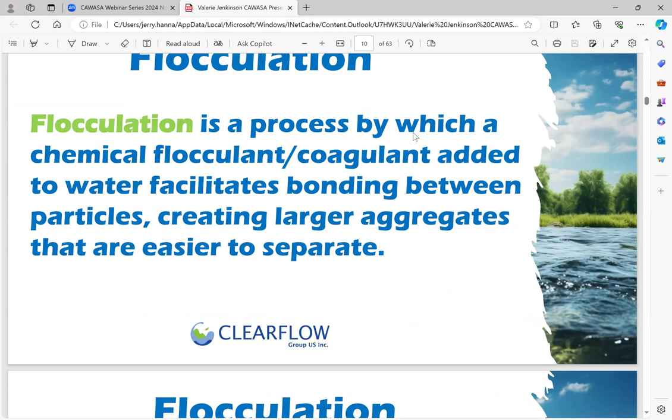Flocculation is a process where chemical flocculant coagulant added to water facilitates bonding between particles, creating larger aggregates that are easier to separate. Our goal initially wasn't to cause the separation, but to cause a particle large enough to capture. The beauty of it was we did it so well, we were able to really clean the water down at the quantum level.

Jar test demo—I'm not going to do that here today, I don't have the stuff. That was what Hank was going to do as part of this. But basically it's a very simple process, 10 to 45 seconds. You mix it around and the deposition starts virtually immediately, and we're looking at a ratio that we can now coordinate the time factor and optimize the usage.

Industries we serve include mining, construction, agriculture, water treatment, stormwater, and hospitality environments.

The other thing to consider is that we can act as a pre-treat, a sole treat, or a post-treat, depending on the application. That's a rather unique position to be in, because if we're going in as a pre-treat, we can augment something that's already there and use existing processes and infrastructure. If we go in as a solo treatment, we can utilize existing infrastructure wherever possible, really minimizing costs, with a very simple application to add into the process.

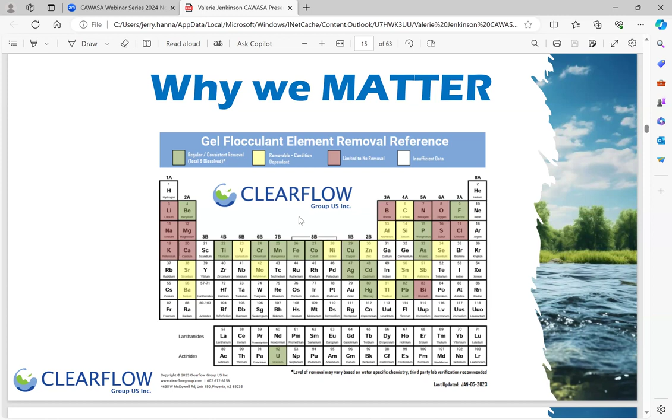We keep adding more and more to this process as our clients come to us and say, can you take this out? Recently we had fluorides - can you take out fluorides? The answer was yes, up to 96%. Can you take out phosphorus, dissolved and total? Yes, we can. Because we're the manufacturer and inventor of the products, we typically invent one or two new formulations per year to answer these other water streams and waste streams we're dealing with. It's a very unique capability, unlike standard flocculation.

Everybody understands the result of a flocculant or coagulant, what it does, but our chemistry goes far beyond the standard chemistry that's available. We're not just creating a thickened process and then combining and falling it out. We have a very good process here where we're actually taking it out without having to worry about things like pH.

In most flocculation processes, pH is a critical part of it, and they're really limited by the pH in the water. If it's a pH of 3, it's very difficult to treat - they may have to do some crazy balancing, or at a 4 or 5. When they're up around 10 or 11, they can't get it out either. So one variation in pH can cause a problem with standard technology. Our technology allows us to work within a range of 3 to 12 without any variability whatsoever in the efficacy of the product. That's a really unique scenario to be in.

Because we started this in mining, dealing a lot with mining and oil sands in Alberta, we had to deal with temperature variances. For mountain mines, we had a lot of issues with freezing temperatures, and we do a lot of cleaning of water in frozen lake beds, treating the water below the ice. From freezing to boiling, we can operate with full efficacy in both.

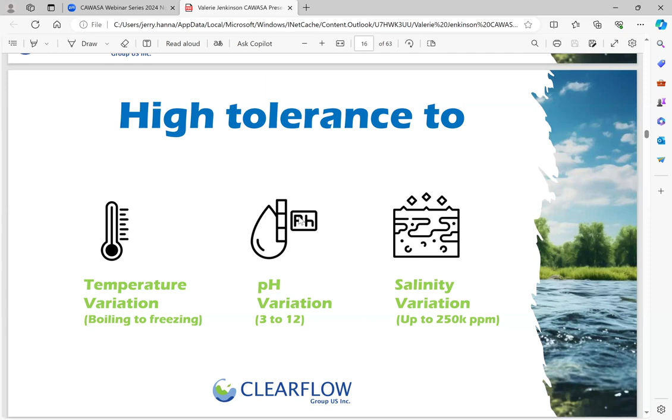One case, we're even up to 250,000 milligrams per liter, parts per million. That's not typical, but we have done it. For the most part, freshwater to seawater is a very easy range.

Operational resilience: this material is self-dosing. It does not require dosing pumps. It's a gel flocculant. Now that Hank's on board, I'm hoping he'll do a demonstration after I finish going through this process to show you how the jar test works. So we don't require costly sensors. It's self-limiting, we don't need metering, and we're not having a lag time.

As I talked about earlier, we're dealing with particle size, not necessarily getting to a particular volume in the water. That gives us a very unique process in pulling out these particles, because they're gathered and bonded through release based on the load factor. So if you have 100 milligrams per liter of TSS versus 1,000 milligrams per liter, it will release the required amount to accommodate that load factor. If there's nothing in the water, TSS is like 1, it releases way, way less than it would at 100.

That gives us a unique property as well, and a long release time. The gel flocculant blocks, if in situ and just put in an open channel, will last anywhere from 8 to 12 weeks - we'll see some pictures in a moment. In some cases we're getting as high as 15 to 18 weeks, but standard is about 8 to 12 weeks. If you're in the reactor or pipe systems we've developed for mixing, those are about 2 to 4 weeks before they need to be replenished.

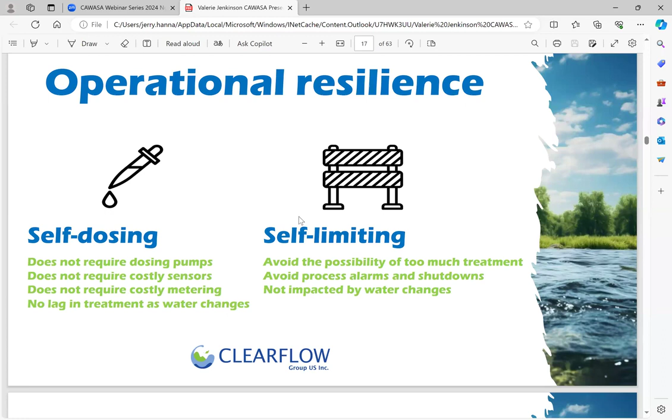Environmentally friendly - we've won numerous awards. In 2022 we won the Sustainable Earth Award. We won 2021's Clean Tech Award, an international competition where they chose 3 companies to be the winners, and we were one of the 3. We're very, very proud of all the awards we've won over the years - probably too many to mention.

Our approach is to utilize site-specific samples, layouts, and documents to understand the challenges our clients face. Then we come up with a solution based on our gel flocculant and our ClearFlow technology that will be optimum for the site. We do request water samples so we can determine a specific match of our formulations to the water chemistry and constituents in the water.

Now we get into the wastewater fun. Well, I've been dealing in wastewater since the first, when I was 6 years old and fell into a septic tank. I don't think life has ever stopped since then - I've always been around water of some type.

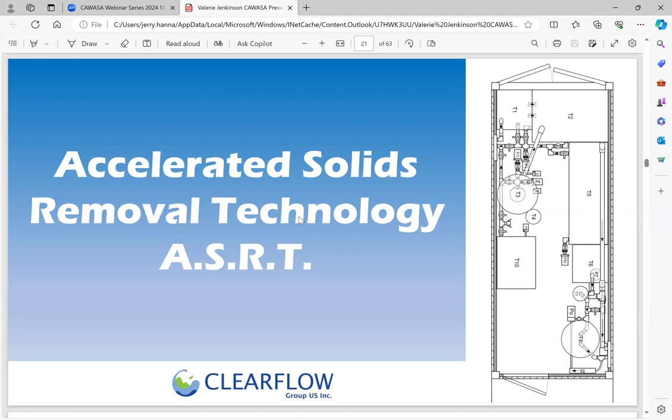We developed a system called Accelerated Solids Removal Technology, or ASRT. The one I'm going to show you here is for 23 cubic meters a day treatment. It's a batch process, but they're scalable, and we've scaled up to larger units. You can put them in series as well and do higher volumes. We have a number of them in India going anywhere from 10 cubic meters per day up to hundreds of cubic meters per day, so it's just a matter of seeing what's there.

Our comparison: centralized wastewater treatment is becoming a big issue, mainly due to infrastructure and cost of running infrastructure to low populated areas. They're large, expensive to build and operate, complex, require lots of money, people, technology, and training to operate, and they have a bit of a limited user base. Then you have localized wastewater collection, which goes to a sump system dumped off at a centralized plant - inexpensive and portable, but again manually intensive.

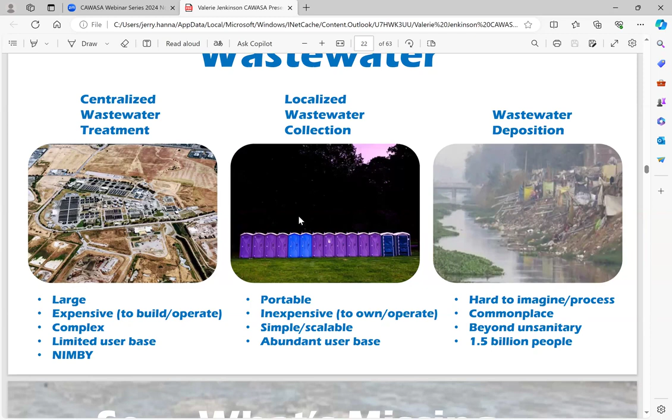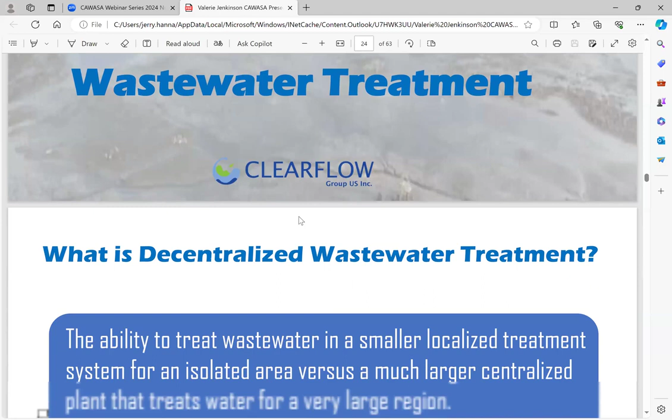It's pretty scary stuff in some of the sites that I've been to all over the world. What's missing is basically an innovative decentralized wastewater treatment process, which we feel that we've come up with. In my 47 years of dealing in wastewater, this is probably the most efficient system that I've seen. I hate to say that sometimes because I really sound like I'm blowing my own horn, but it is a reality, and we've been told that by many, many people that use it.

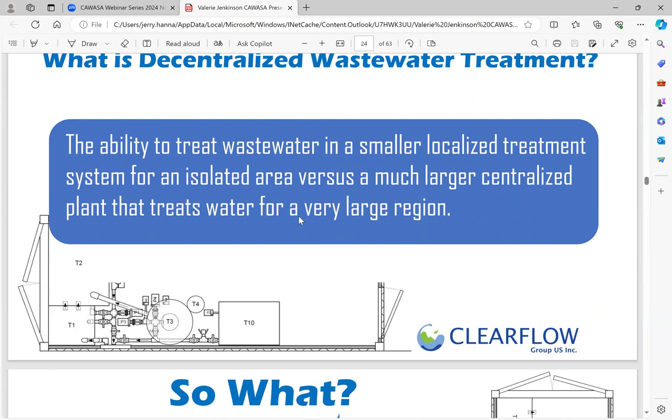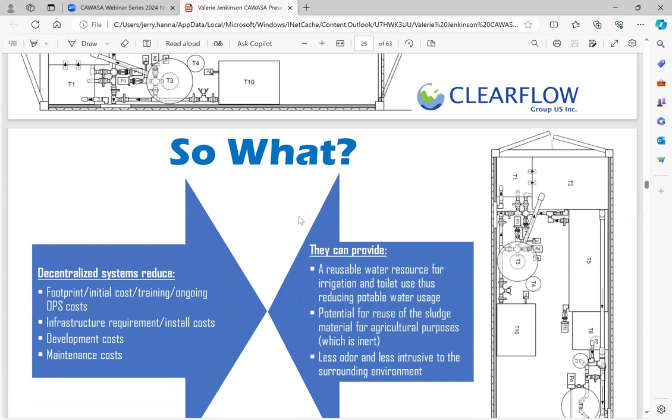From the perspective of operational, it's very simple. You do not need to have multiple engineers operate it, and it can very easily be moved, transported, portable, or made to a fixed system. So what we do with decentralized systems and our ASRT system is we're basically minimizing footprint, timing and process, initial cost, training, ongoing operational cost, infrastructure requirement, installation, and development costs and maintenance costs.

The core technology in the ASRT, again, is our gel flocculant, and it's very unique property when it actually deals with ozone, because we do have ozone that we've operated in this very low self-producing ozone system. But typically to get to an ORP value of about 780, you're looking at about a 20-minute process. When we add the gel flocculant within our system to this process, we're gaining a huge amount of time, in about 4.5 minutes we're at the ORP value required. So really a huge, huge difference in operational capability and results.

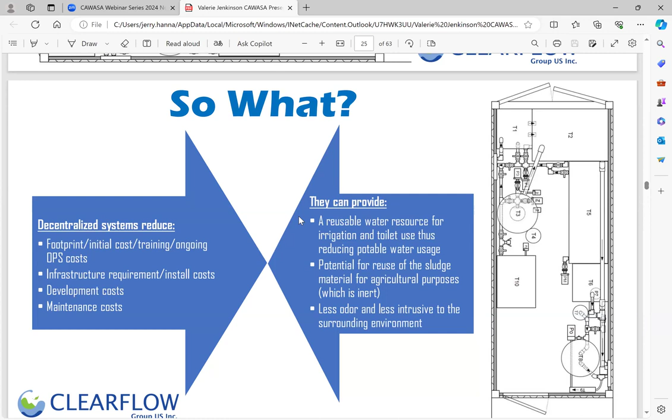So again, we're providing a reusable water source for irrigation and toilet use. We're providing potential for reuse of the sludge material. The sludge that's based in our system, once it's done, that sludge material is basically inert after 24 hours, so it can be reused. It's not going to have the bacterial issues that most sludge materials would have. Again, less odor, less intrusive to the surrounding environment as well.

So it's a physical mechanical process that Clearflow has developed and patented. It allows for the removal of sediment within minutes, not hours, or days or weeks. Typically, if you were to put this beside most even decentralized plants that we've dealt with, our operation is within 3 hours, you're seeing clean water. We like to say 24 because then everything has happened, even with the sludge. And it will do about 5 weeks worth of work in that short time period. So it's a huge competitive advantage to have this process.

We constantly are working with the National Research Council of Canada and University of Alberta. I represent as an ambassador for them as well. We're very heavily involved with doing continual research, and I lecture at the university as well, probably about, oh gosh, at least once a month I'm in there helping students and PhDs finish off their graduate studies, etc.

It's very good where we're looking at, again, all of the constituents within the water, TSS, TDS, BOD, removing it from the water down to the levels that need to be hit, and for reuse as well. So we're really looking at that, having an advantage of very clean water for repurposing. We're continuing to develop and research into much more applications, which, as we're finding as we go into different countries, various things that we're looking for.

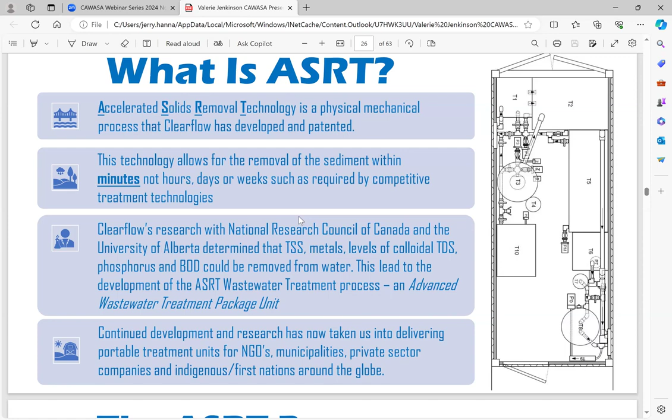One of the advantages is that we get a lot of the metals and things out as well. And in much of the wastewater streams that we're dealing with in some of these countries, they do a lot of mining or close proximity to all their waste streams. We're having to take out some very nasty metals as well. So this process does it all in one. You're not having to add a secondary process.

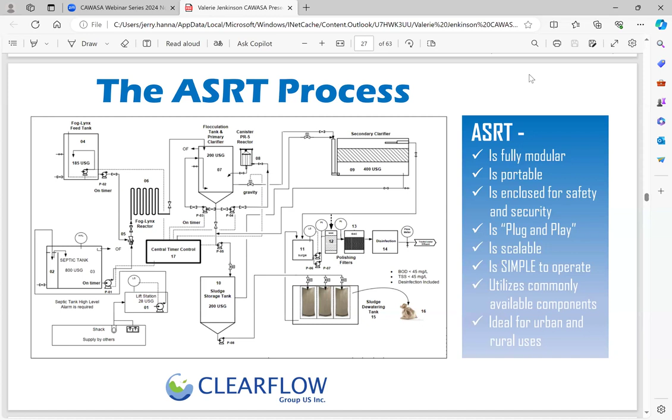It's fully modular, it's portable, it can be trailered. It's enclosed for safety and security, it's plug and play. We've made everything so it's field ready and field maintenance capable. So it's a matter of just changing out a pump, to just unplug one pump, put the pump back in. We've made it very, very simple for the operational piece. We're all about the operations and making sure that it works for those in the field. It's scalable, it's simple to operate, utilizes commonly available components, localized, and ideal for urban and rural uses.

So stage one in the process for the ASRT is multiple source influent water consolidation, loading surge tanks for volume control, utilizing macerator pumps to achieve particle size uniformity, and also looking at going into stage two.

The influent water is treated with gel flocculant and what we call Fog-Lynx, which actually destroys the fat, oil, and grease by breaking it down—something most systems do not do. Those systems get a buildup of fat, oil, and grease that causes a lot of clogging, whereas ours breaks it down and makes it simple to incorporate into the process and release the water.

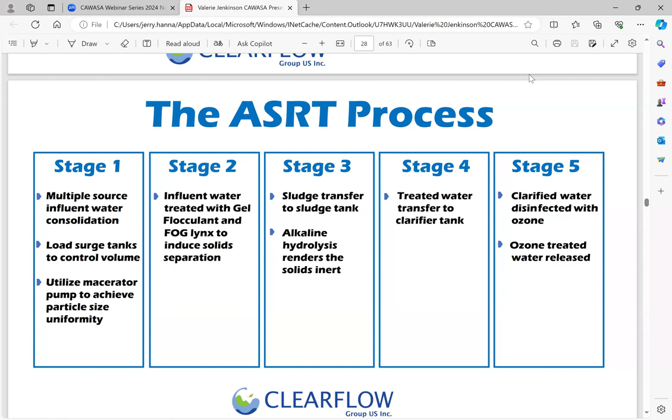Stage three: sludge is transferred into the sludge tank, where an alkaline hydrolysis process renders the solids inert, as I talked about earlier. Stage four: the treated water is transferred to the clarifier tank. Stage five: the clarified water is disinfected and ozone treated and released.

The process on a 150 gallon batch system is about a 20-minute batch cycle time. So real simple and easy.

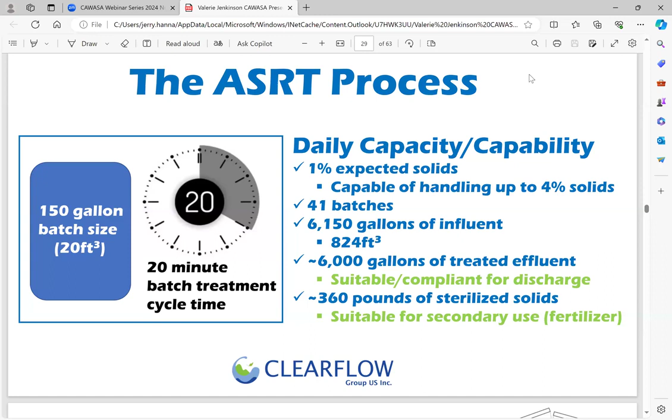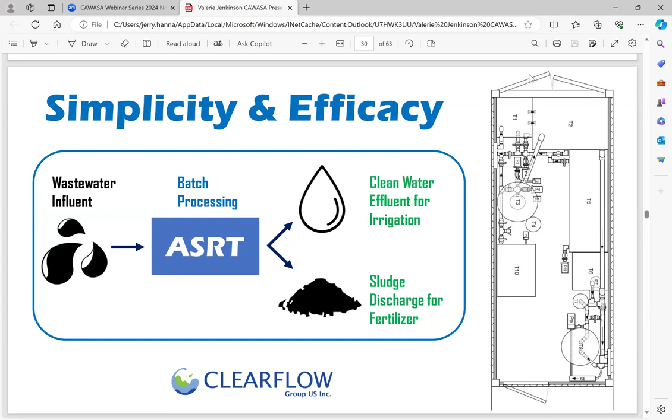Basic capability is 1% expected solids ratio, capable of handling up to 4%, across 41 batches, or 6,150 gallons of influent. About 6,000 gallons of treated effluent is suitable and compliant for discharge, and we have about 360 pounds of sterilized solids available for secondary use. So really a simplicity and efficiency process, with high efficacy, and a lot of resultant reusable materials.

Results—this is actually some results we had done by a lab in India. The reason we put this here: if you look at the bottom, they had a lot of metals—iron, nickel, but also chromium, which was really nasty. We were able to take all of those metals out and bring them down to non-detect.

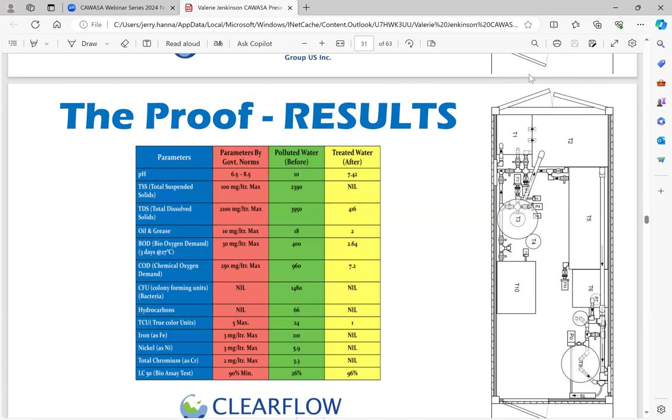We also took the TSS down to virtually a non-detect factor. The pH just needed a slight balance. The total dissolved solids, of course, reduced dramatically by about 8 times. And the fat, oil, and grease—again, a big one for us—we reduced by 9 times. So the results are rather amazing for what we can get out of a very small system.

This particular unit, as mentioned, was the 23 cubic meter per day system—a really simple 20-foot C-can or containerized model. Setup time is about 8 hours to get everything operational with the lift stations, and technical support is available.

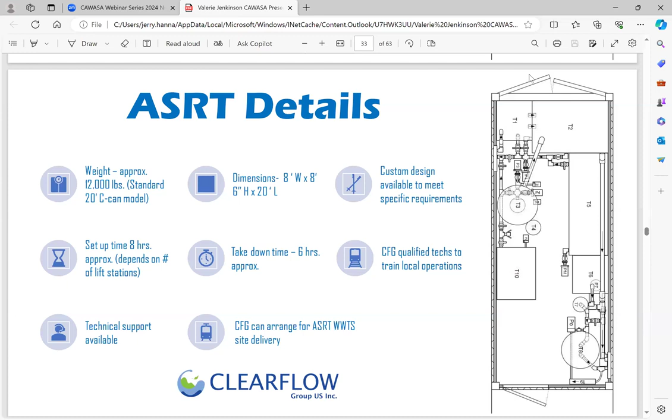Dimensions are about 8 feet by 8 feet by 20 feet long. Takedown time is approximately 6 hours. We can arrange site deliveries, etc., and it can be configured to meet specific requirements. If you have industrial waters to deal with, we'll run extra testing in our labs to make sure we get the right formulation for that application.

So again, going into repurposing and water restoration, we talked about different flocculant types currently available that have been around for many years—granular and liquids—and now, of course, our addition of the gel flocculant.

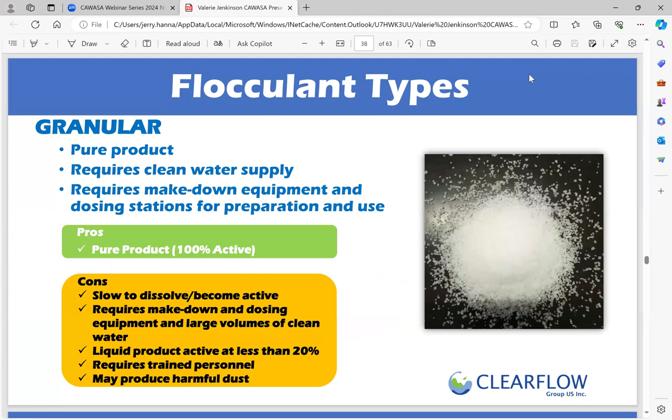Granular is a pure product. It requires a clean water supply, make-down equipment, dosing stations, highly trained personnel, and a very high ratio of monitoring to ensure no negative effects on the environment. It's 100% active, available in cationic and anionic forms depending on the application.

In many cases we see anionics used less than cationics, although that's starting to change. The cationics have very negative effects on aquatic life and are slow to dissolve and become active—typically a 90 to 120 minute make-down to convert it into a liquid before dosing. Most people don't wait that long and end up dosing out live product, which often results in a lot of animal kills or fish kills.

It requires make-down and dosing equipment, and large volumes of clean water to make it down, since you're typically running at about 0.5% to 2%—no more than a 20% mixture, but typically 0.5% to 2% is the operational ratio. So you're looking at well over 90% being water.

So the liquid product is active less than 20%, as I mentioned, and requires a lot of people to operate, and can cause inhalation issues for humans from the dust off the granulars.

Liquid again, there's two types. There's the emulsions, which is water and oil already pre-mixed in a specific blend. You're still looking at about 70% water and oil mixtures; approximately 30% is active product, and it requires addition of a coagulant.

Typically the equipment for them alone, in North America, is about $200,000 to $500,000 per unit. So when you have multiple site units on a large location, it can become quite costly. That's one of the biggest things - high cost to ship, since it's mostly water in the product.

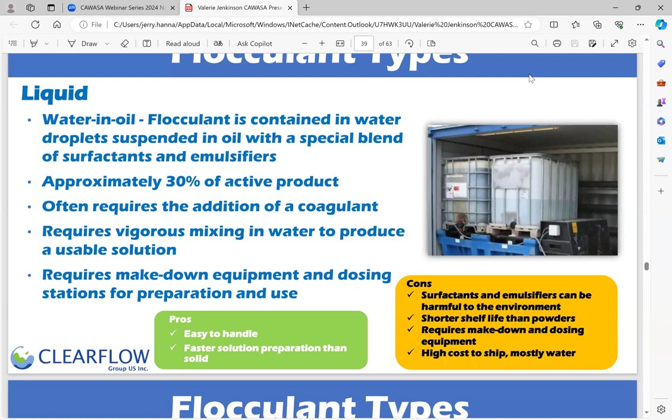They require make-down and dosing, shorter shelf life than the powders, and the surfactants and emulsifiers are almost always toxic to aquatic life. So not great. They are easier to handle than a granular because this is already pre-made and ready to dose. So it does have a couple of pros, but the cons typically outweigh that.

Dosing stations, as we talked about, have very high capex and operational costs. The energy required to operate and maintain them gives a higher carbon footprint and greenhouse gas emissions.

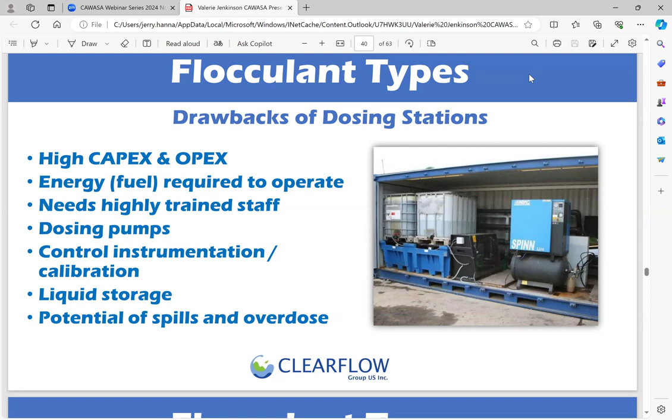Dosing pumps are expensive and very finicky to deal with - they don't necessarily always run the way they should. There's control and instrumentation calibration, and a huge amount of lag time, because typically you're doing a measurement off your water quality that gets transmitted through the sensor back to the panel. The panel then starts adjusting the dosing, so there's a big lag time, and that becomes a problem, along with a very high potential for spill and overdose.

They have a high tolerance for pH, as we talked about earlier, from 3 to 12. There's a broad temperature range from freezing to boiling, and high salinity tolerance across freshwater and seawater. They reduce sediments, metals, various nutrients, organics, VOCs, and levels of light hydrocarbons, and are capable of reducing turbidity.

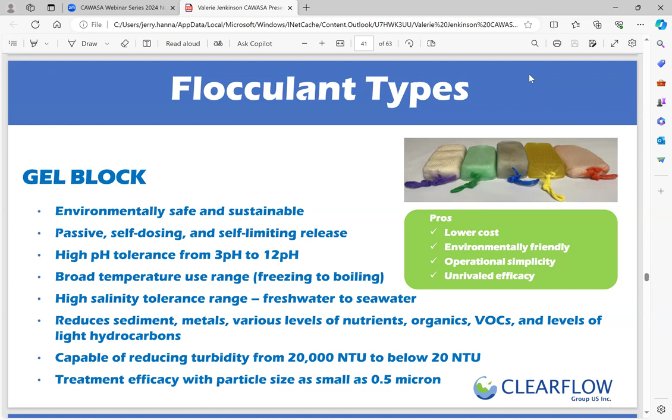We say typically about 2% solids would be the high end. We have gone higher than that, as high as 4%, but typically we're working in a ratio of less than 2% solids, or up to 20,000 NTU. And we're getting particle sizes that are nanoparticles - well below 1 micron in most cases.

They just need, for operational efficacy, compromised water, and they need flow energy. So the process of release, instead of having a pump that doses it, is based on the amount of flow that goes over them, and mainly the particle load. The higher the particle load, as I talked earlier, the more it's going to release; the less particle load, the less it's going to release. It needs that turbulent energy to cause particle collision, so the particles will actually bind together and fall out.

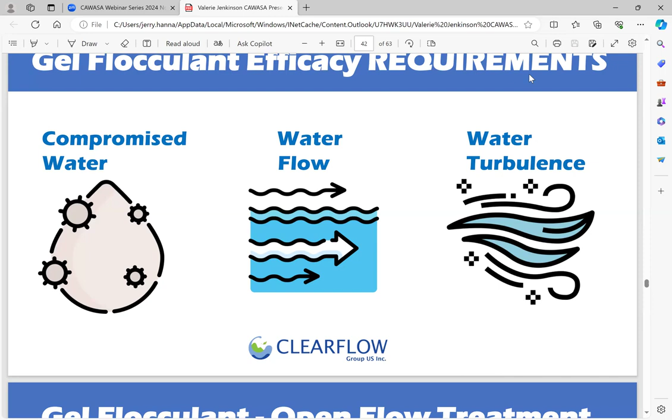So, very simple process - flow energy is virtually what does the job, which eliminates tons of equipment. You don't have to have the dosing equipment, the monitoring equipment, or the big floc stations, and you're saving hundreds of thousands of dollars in OpEx and CapEx.

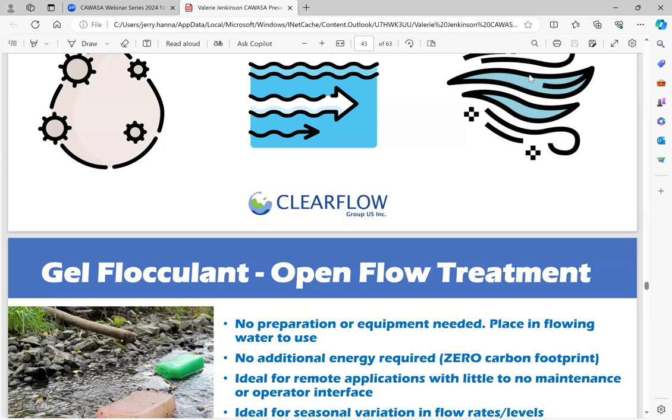It's as simple as putting them in a stream. Here's two blocks in a stream right now - this is actually out on site. These are the gel flocculants in an open flow treatment.

These are the ones that would last anywhere from 3 to 5 months. Typically, as we say, about 2 to 3 months, but I've seen them go as high as 5 months.

We manufacture them under high quality standards. It's our own manufacturing process, right in our plants in the US and in Canada. We have different formulations that can be used independently or in combination.

Their consumption rate is visibly discernible, and as I said, it's based on the particle load. They do hydrate and swell, and when they get to a point of swelling, they're actually releasing - so they've been activated, they're releasing. Say the water goes away and they're bone dry, and you have no water for 6 months or a year - water comes back a year later, reactivates them, and they're operational again.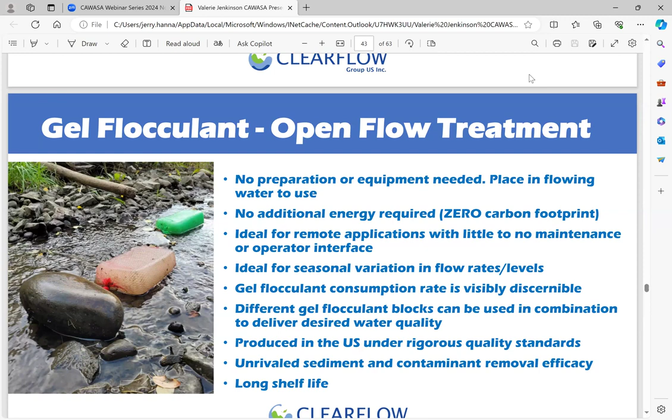So again, a very unique feature: zero carbon footprint, you're not using any energy. You just have to have them placed in the right spot. They're totally safe for the environment, fish, aquatic organisms, mammals, etc. And a very long shelf life. We say 5 years, but I have products in my warehouses that are over 10, 12, 15 years old that would still activate.

That's an open flow treatment again, and operational costs are way below $1. Per gallon cost is portions of a penny per gallon. We're saying 30 days, 60 days, up to 90 days application, so that's why we put the pricing range on there for those various operational timelines.

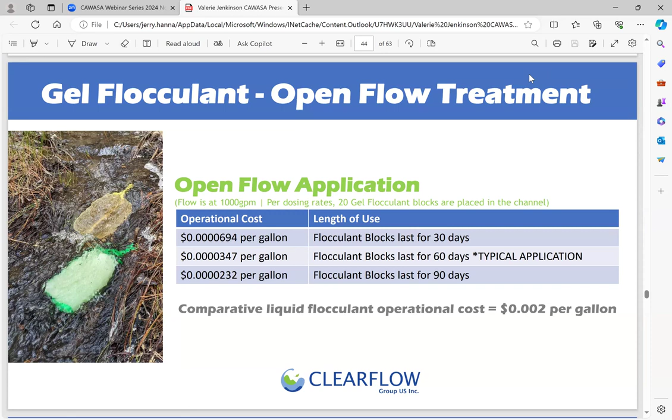If you look at a comparison to liquid flocculants, obviously we're considerably cheaper and much easier to operate. That comparative doesn't really compare all the costs in buying the equipment, so we're way, way cheaper.

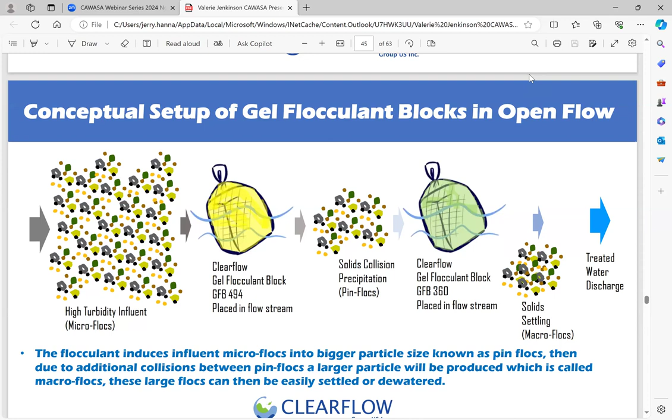Conceptual setup of an open flow system: have the turbidity influent, put our gel blocks in place based on the flow value. We have a calculation, so many blocks per volume of flow. They have a mixing time, which creates the collision and precipitation of the flocks. Then we have a gel flocculant 300 series, which causes the flocks to bind even tighter and heavier. Then we have the settling or capture point, and the released water is treated for discharge.

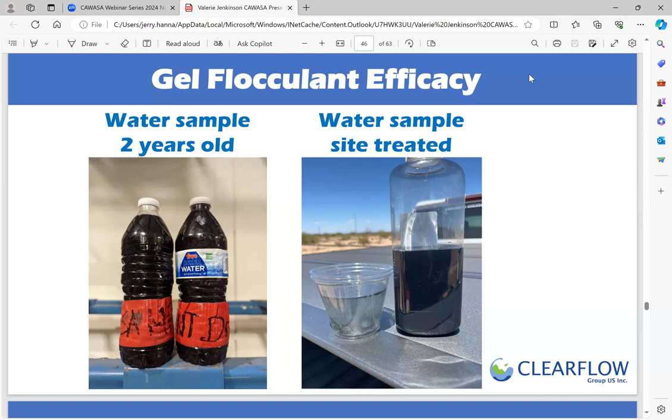There you go. Water sample 2 years old, water sample treated. Very, very big difference, substantial difference.

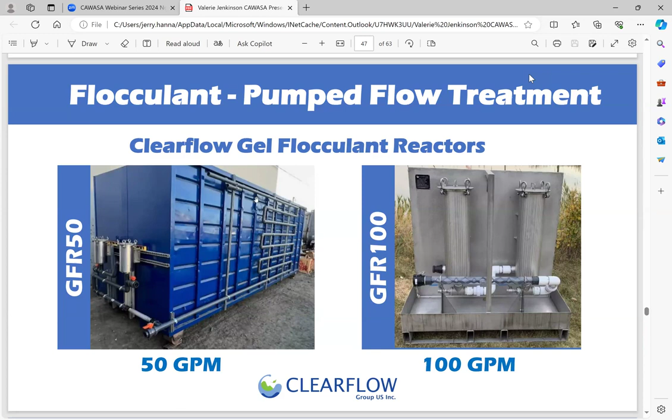So there's a 50 gallon per minute system, 100 gallon per minute system. Here's one in play, a 1,000 gallon per minute system and a 300 gallon per minute system. We've now just introduced a new version of the 300, which is almost identical to the 1,000 gallon a minute system, just a smaller version. As you can see, the only thing we need there was the pump. There's no moving parts, just cartridges that get replaced on a periodic basis based on usage.

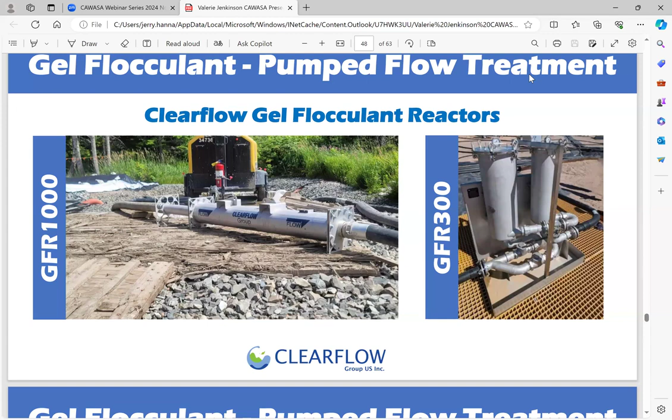This particular site is 5,000 gallons a minute we're pumping into 5 different reactors off of a manifold with an 8-inch inflow line and a 6-inch line going into the individual reactors. This is a very large mine site. They now have 26 of these reactors, and they're pumping all over the place to clean their water. We're actually moving a lake so that they can drill a mine shaft.

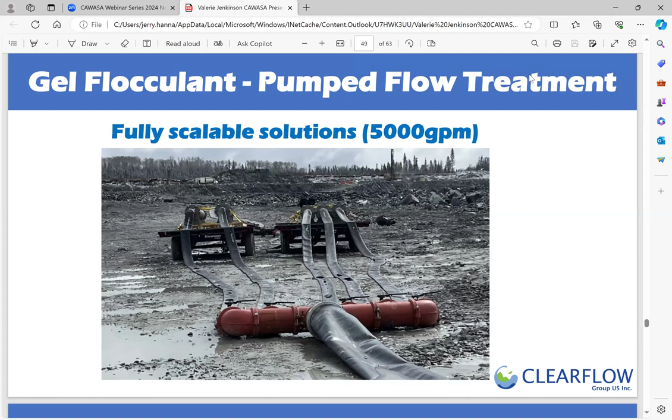So that's rather unique. Here's how simple the reactors work, and this will work for various ponds that have lagoons that are wastewater based as well. It can take a lot of that material out and make it higher quality than what it is, and then it could act as a pre-treat for your systems that you already have in place. As I said, we can be a pre-treat, a sole treat, or a post-treat. In a lot of cases, we can do even post-treat for your wastewater plants. If you're having a little high turbidity, we can do that final polish before we go.

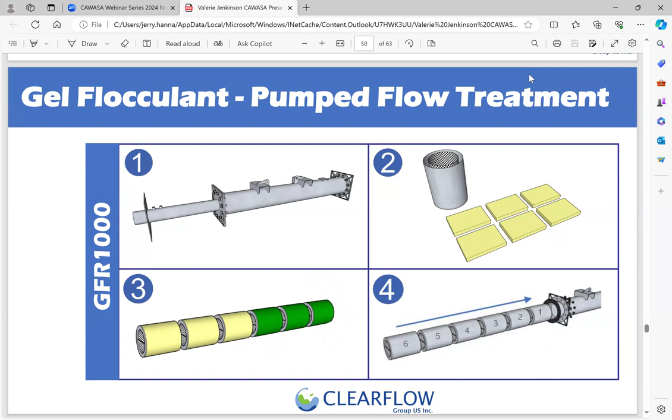Here's a reactor, the primary stage, number 1. On the left-hand side of the unit is a 6-inch or 150 millimeter pipe that's got basically a flighting inside of it, creating a vortex energy that goes into the larger system. In picture number 2 you see the cartridges. Each individual cartridge holds a certain amount of the gel flocculant slab inside of it, and each of those cartridges gets put inside the larger body of the reactor system, the mixing system. There's 6 of them in there, and this would be changed out every 2 to 4 weeks standard. It has the right formulation as we deem based on the water testing we've done for your site, and this will treat up to 1,000 gallons per minute.

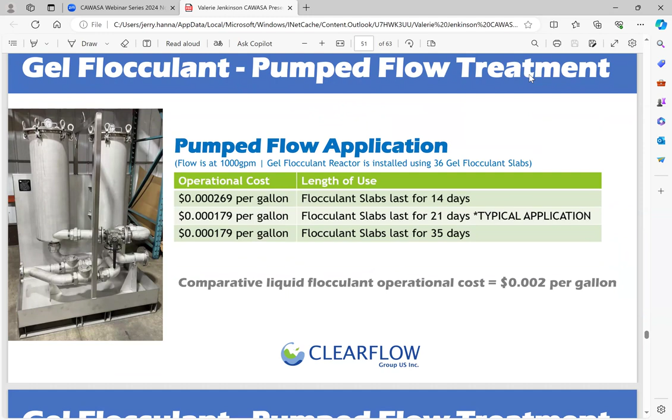Again, the cost we've got is astronomically cheap compared to what's out there, and the OPEX is very minimal. If any, just check your units every once in a while, make sure they're still operational and having the water go through, then replace the cartridges as required.

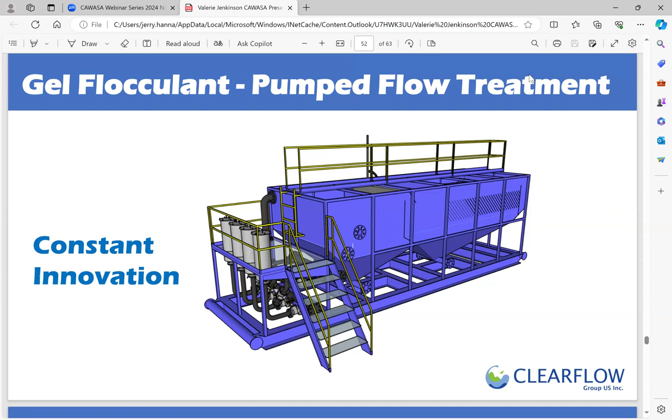Here's a larger version of this. Actually captures the solids as well. Instead of having a deposition point, we have some sites where they cannot capture the solids. So this would be the plant. The water goes into the vertical stacks, which has the gel flocculant in it on the left-hand side, then goes to a specific treatment for clarification, capturing all of the solids, and then the final water is released for final polish or just released to the environment.

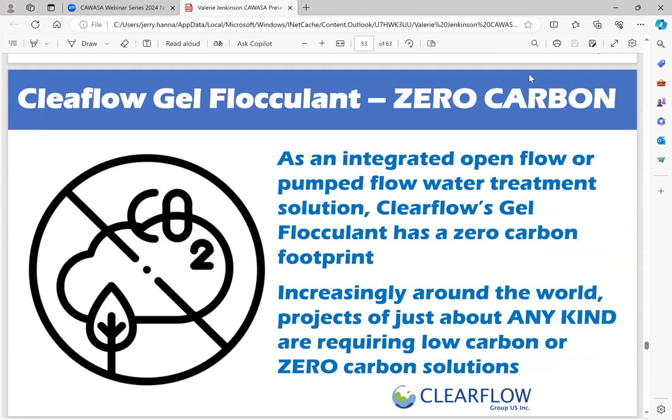So it's a zero carbon integrated flow process, zero carbon footprint. And again, we're going worldwide with this.

So a little quick touch on stormwater. A lot of stormwater situations are being amplified by wastewater inflow to them, especially with flooding. With the flooding, you're getting a lot of fecal matter and other organic materials in there, so sewage overflows are getting into stormwater as well. So it's quite important that we maintain the quality of our stormwater for repurposing and reuse.

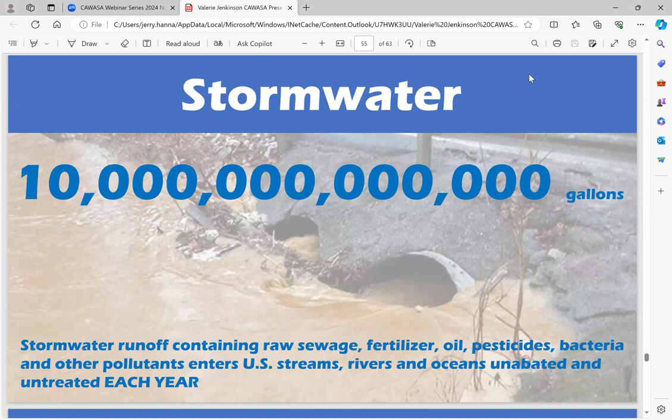Again, the hardest state in the US to get approvals for is actually Washington State, in the Western US. They have very stringent guidelines because of their proximity to the ocean and how much they deal with the ocean.

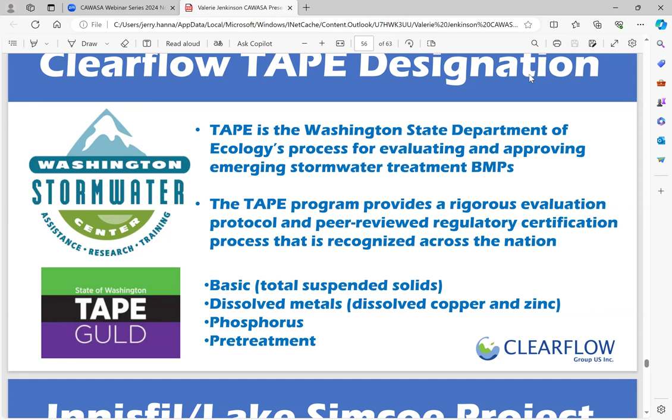All of their studies, we are approved for use in Washington, but their studies, we were given approval in 3 weeks versus the 2 years that it normally takes or more, because they based all of their criteria on our technology for other companies to come up and get their approvals. So they have to meet the criteria that we meet, and we gave them all of the initial data. Their criteria is based on the Clearflow product. So we're very proud to have that approval, and the fact that we helped them change their process.

This is a big infrastructure process that was being built and added to for a subdivision. They're adding quite a few hundred homes. The federal government, National Research Council of Canada, got involved and asked us to prove that we could take out phosphorus because they were having really high phosphorus loads coming in and getting into one of their major lakes from all of these subdivisions and their stormwater.

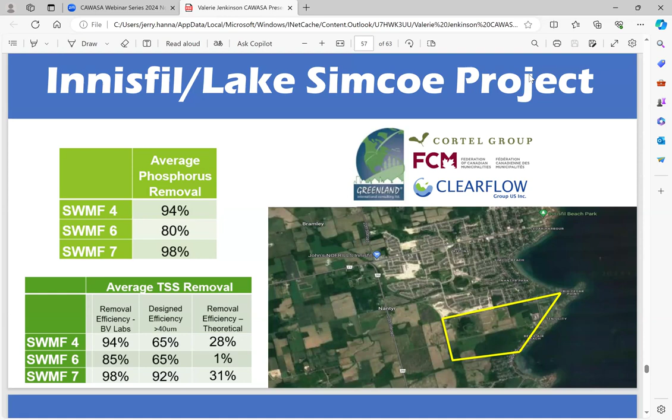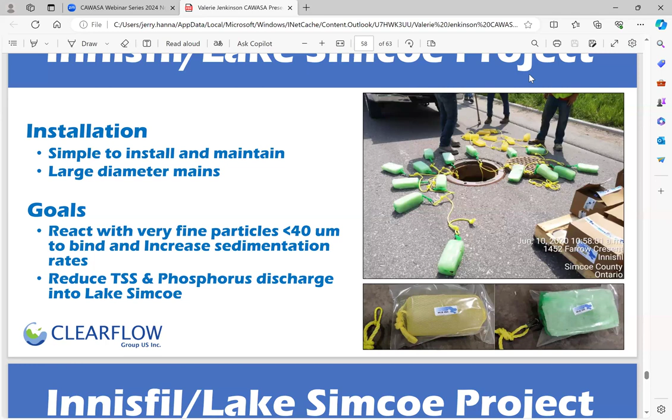Very simply put, we used existing infrastructure. We put our blocks down into their storm system and it reacted with the particles, and then when it came out into their storm ponds, it dropped all that material. We did some natural fiber material that we provide, treated with our product, as a final polish in the ditches, and the water went clean into the next level of environment.

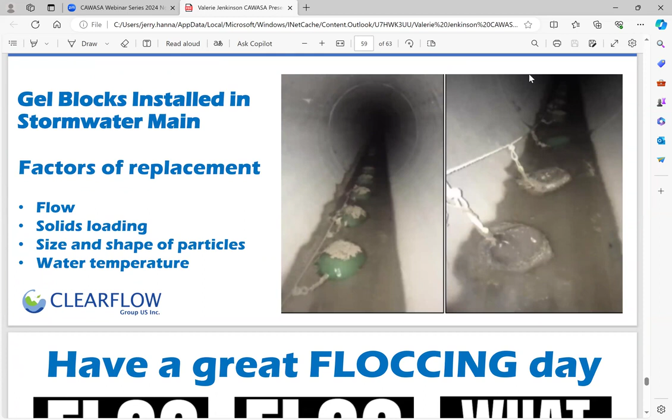So very simple. Here's pictures of it in situ, in the storm pipes. Nice, simple, easy to operate with. Doesn't cause any blockages. And we're just hoping everybody's having a great day.

And pardon some of the connotations here, but just a little bit of a laugh at the end here.

So we're globally proven. We're starting to globalize our company now. Hopefully this has been great information for you. We'll just open it to any questions you might have. Thank you.